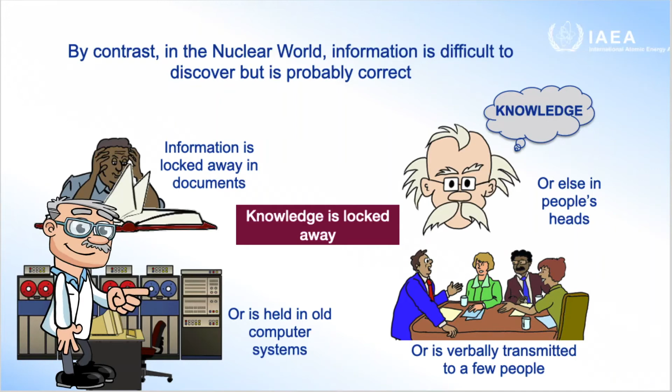Imagine the power of Google and YouTube being available to all inexperienced nuclear operators and maintenance staff. Being able to draw on the experience of experts because they had converted their knowledge to data. And I am a case in point. I am mostly retired now, apart from the odd consultancy. But there is lots in my brain that nobody else knows.

I have left 3 different nuclear companies 4 times. But each time, there was no mechanism for extracting my knowledge before I left, apart from the work I was undertaking at the time. This is both a technical problem and a cultural problem. Why don't we pay our staff to create video snippets that can be available on a company YouTube channel? Why is there a reluctance to share our knowledge with others? Is it because my knowledge sets me apart and is the reason companies will employ me?

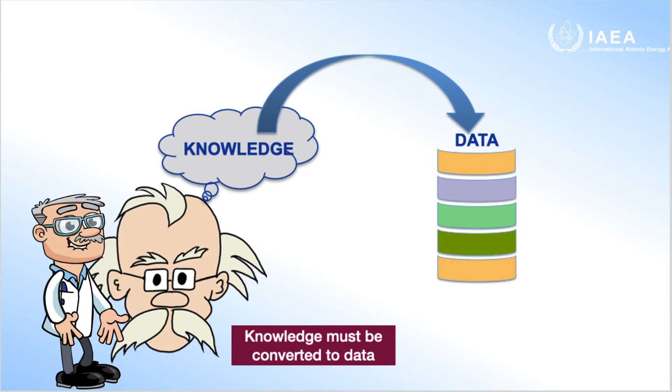So there is a knowledge management issue for existing nuclear operators. How can we ensure that the knowledge that is wrapped up in people's heads, in documents, in old computer systems, can be extracted into a format that can be used by others? And this is a cultural as well as a technical issue.

What happens to the knowledge, the information, the data held in design systems, from manufacturers, from constructors? How is that knowledge passed over to the operators? Will it be done using paper, via PDFs? Will it be done at all?

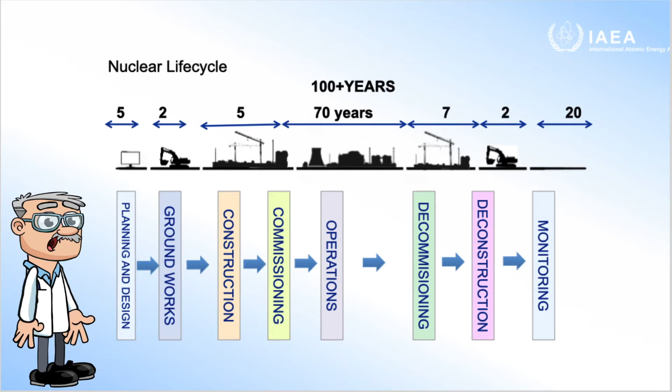Then you have the design process. The design may be performed centrally by one design organisation, coordinating the NSSS design, the turbine island, the admin buildings, the roads, the networks. But often, different organisations may be involved, and it may be unclear who will stitch the design together, or even agreeing on standards between these organisations, each with their different computer systems. That may be difficult.

Once the design is done, the next stage is to construct, buy or manufacture the elements of the power station and put them together. You will construct some parts, the building, the concrete. You will buy other parts. You will manufacture other elements. Many different organisations will be involved, each with their own IT systems and standards, and none of them will be pleased about handing over information to the operator.

I won't go into the rest of the diagram, apart from pointing out that even whilst in the operational phase, different organisations may be responsible for, say, any ongoing design changes to the nuclear elements. So the life cycle actually looks something like this. The picture is more fragmented. Many different organisations using many different computer systems are responsible for different parts of the life cycle.

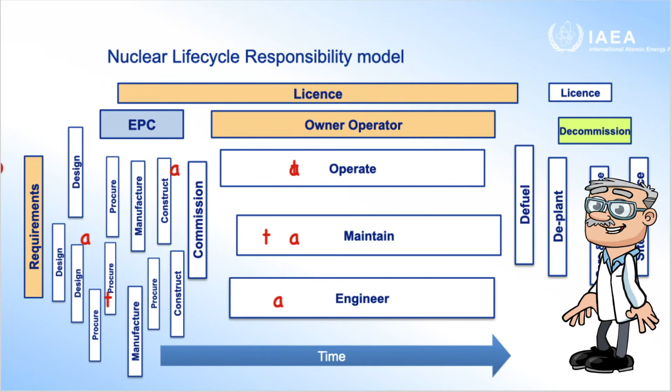But the customers, the operators of the station, need information in a consistent and coherent way. So how can we ensure that the suppliers of the power station, the designers, the constructors, the manufacturers, provide the information in a consistent and coherent way? My point is that the operator needs data. It needs data to maintain and operate a safe and effective and efficient power plant. It needs everything that the combined EPC organisations can provide.

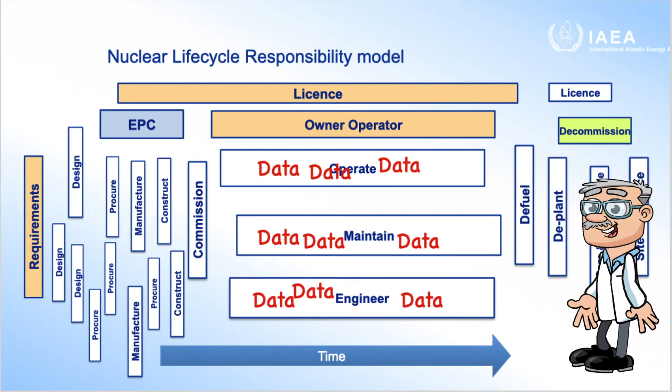Because the alternative, which actually happens even in power plant being built today, is that the operator has to employ an army to collect that information. The information is made available, but the default is to offer all the information in the form of PDF documents, which brings us full circle in that the knowledge is being hidden in documents.

So, at the same time as building the physical plant, you have to make sure that you can also build the digital plant. You cannot do this alone. You need cooperation and commitment from all elements of the supply chain, the designers, the constructors, the manufacturers, the decision makers, the safety engineers.

But what is the digital plant? We use a term in the nuclear industry called systems, structures and components. This term encompasses the structures, the buildings, the rooms, the steelwork, the pipework, the components, the pumps, the motors, the valves, the cranes, the turbines. Between them, the structures and the components represent all the elements of the power plant, and the systems is how these components and structures are all put together, how they work with each other to make the power plant operate.

The digital plant is everything associated with these systems, structures and components. The drawings and documents, the 3D models, the manufacture details, the maintenance and engineering history, what function the item has, how it relates to other items of plant. The decision making behind the item. What are the requirements? What is its safety function? How is it constructed? Its spare parts, its maintenance and operating instructions.

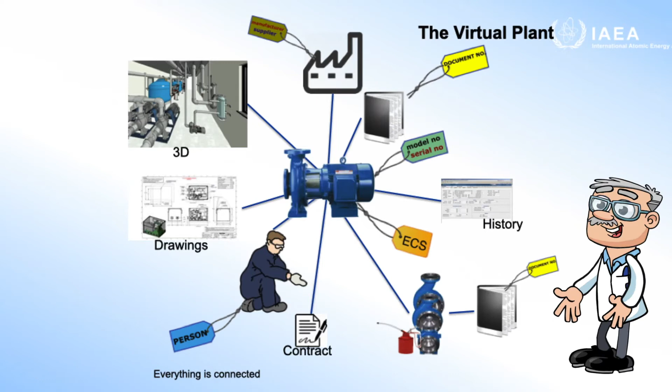Ideally, in the digital plant, all this information should be readily available and understandable to anyone. How then does the owner-operator get this information, this data, this knowledge on day one of operations? It needs, first of all, to establish its requirements in all of the contracts it has with the EPC companies. Each contract must have the data or digital plant requirements and expectations built into it.

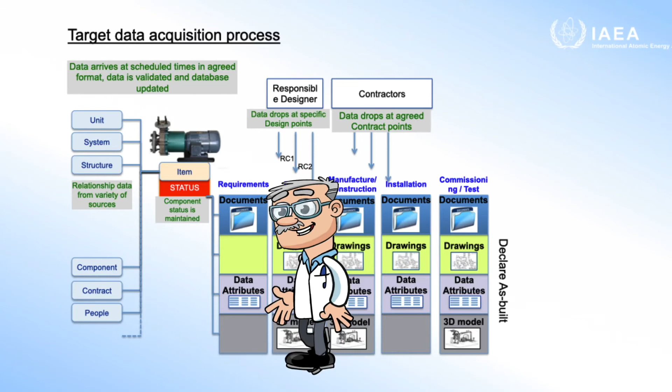The Building Information Modelling, BIM, process, embodied in PAS 1192, now rebranded as ISO 19650, can help create a framework for data delivery, what data is required and when. But you, as operators, must also establish how you are going to collect and verify that data and how you are going to build your digital plant.

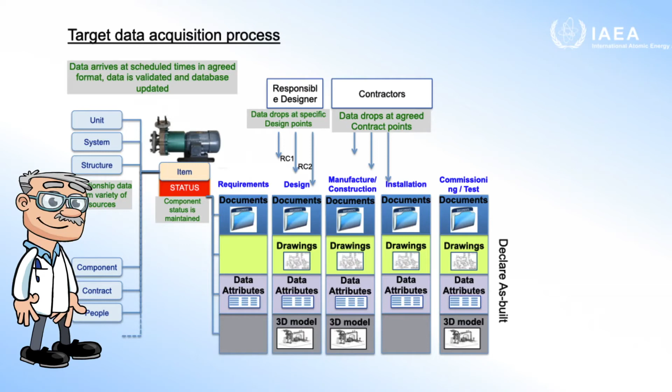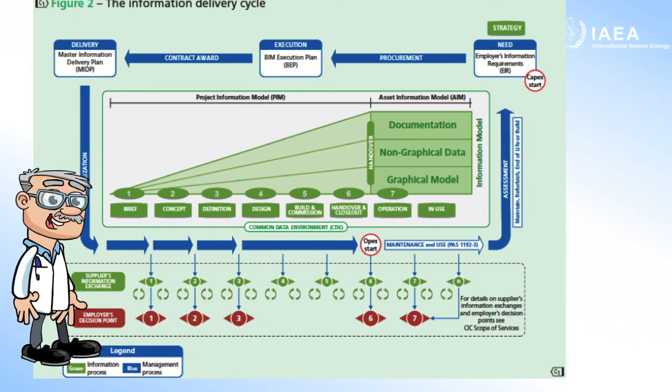For those of you coming into the project from the construction industry, you may be aware of the BIM process and wondering how this aligns with these principles. The BIM process, however, does not give a silver bullet solution. The difference is in the sheer size and volume of what we are requiring from a normal BIM organisation and the importance of it. The data we are asking for is greater than what BIM wants, and the level of complexity of the models is far higher.

To achieve this, we need to build the physical architecture, the networks, the servers, the integration hubs, the laptops, the mobile devices, the desktops, the information systems architecture, systems, interfaces, master data management, processes, workflow, a security architecture, especially around integration with C&I protection and control systems, people trained, system administration and support arrangements in place, data to fill all the systems and to ensure that the station operates safely, effectively and efficiently from day one.

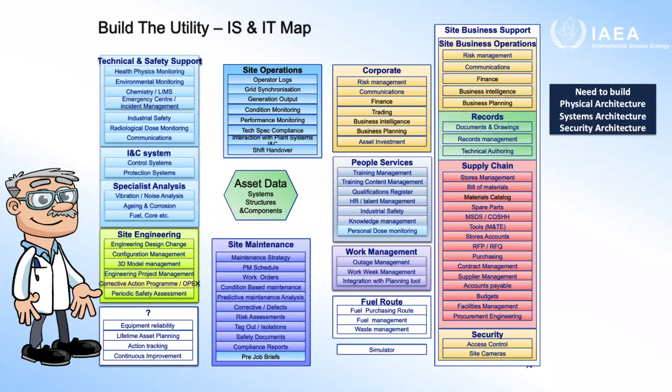There are a number of considerations in identifying the data that has to be collected in a new build situation. Firstly, there are the types of data. Identification, basic identification, the entity name, description, classification, the safety class, critical equipment, fire equipment, containment closure, environmental classification,

the dimensions, height, length, depth, weight, location, where is it, specification, design information, what must the component do to meet requirements, the discharge pressure for instance, the temperature range, the operating state, etc. Then we have the information that we need to get from construction, manufacture or procurement. Then installation information, commissioning and operations, testing information. Some attributes are generic or specific to the component or structures involved.

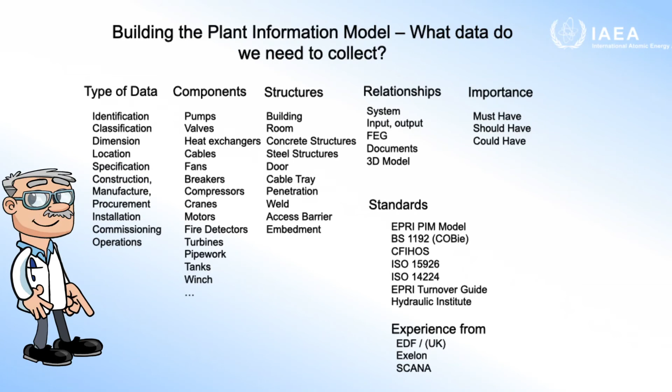In conclusion, what I have given you are the ingredients with which you can build a plant information model. The work of EPRI a few years ago, and of the IAEA, has tried to push for a nuclear standard methodology in this area. But whilst these documents are very good sources of background, the formulation of a worldwide PIM standard for new nuclear builds is some way off.

The work that I and a few others were doing at Horizon Nuclear in the UK was probably going to be the best example I have seen of building a PIM. But unfortunately, as with many nuclear projects, the build has stalled and is unlikely to proceed. Which brings us round to the beginning of this presentation. How do we capture the knowledge that was in that project and others?

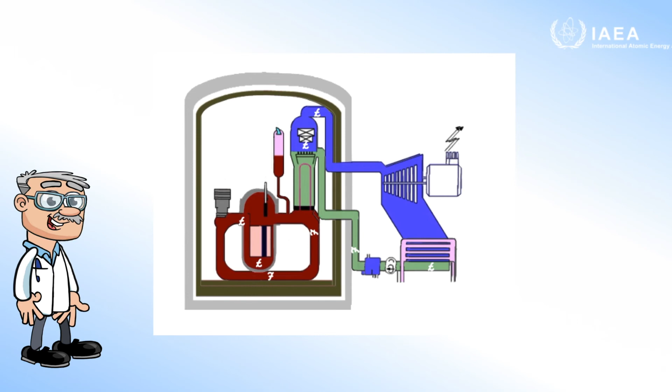So why do we need all this data? The economics of a nuclear power plant are simple. As most plants around the world operate as baseload, if a plant is operating, it is making money. If a plant is not operating, it is losing money. So the aim is to keep a plant working for as long as possible. This means reducing outages, planned and unplanned, spotting problems before they occur and taking action. And when they do occur, taking action efficiently and timely. Faster, more efficient maintenance. Faster and more efficient engineering design changes.

I could go on. In this presentation, I have deliberately not focused on the technology involved in building a PIM. Many companies, Intergraph, Dassault, Siemens, PTC, have all built up their suite of systems and provide software capable of building a plant information model which uses a 3D model to provide a portal into all other information, knowledge and data based on the plant items. And no doubt, their salespeople will demonstrate how this will all work in a perfect world.

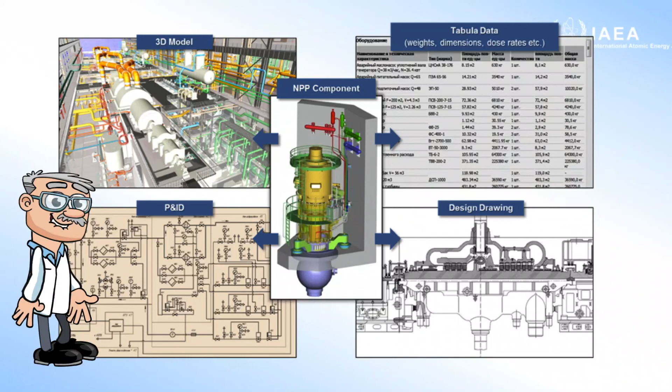However, in my opinion, buying the technology is easy, and all the leading vendors have a solution to fit. What is difficult, though, is filling this software box with the data that the owner-operator will need when most of these systems have been built for the design organisations.

I'm going to finish by looking at how a data-rich environment might be used in the future. For instance, using augmented reality. Information from sensors could be displayed on a VR headset embedded in the operator's helmet, so that operators could instantly spot issues whilst out on the plant. Not only real-time information, but plant identification details, isolation details, defects could all be available on a heads-up monitor.

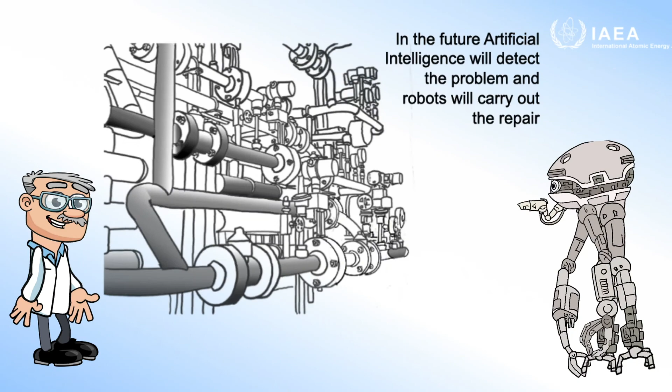Tools, spare parts, consumables could be delivered to the point of work using autonomous vehicles dispatched from the storeroom just in time to work on maintenance activity using an inbuilt 3D map. At some point in the near future, maintenance robots could be dispatched to work in some of the more inhospitable areas of the plant, either driven by experts or working on artificial intelligence to detect problems and fix them.

In the lifetime of the plants, who knows, perhaps there won't be any humans on the plant, and it will be self-operating and self-maintaining. Certainly, we should be currently looking at drones for security, to defend against malicious or mischievous attacks by drones themselves.